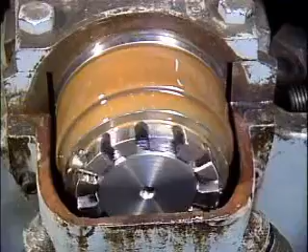A thin film of lubricant is the only thing preventing metal-to-metal contact between the many moving parts in your facility's equipment. If the lubrication fails, expensive machinery can be destroyed in seconds. One of the most widely used types of lubricating devices is a hand-operated grease gun.

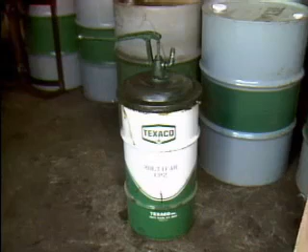Many grease guns can be filled directly from a drum through a fitting. These are called bulk load grease guns because they are filled directly from a bulk supply of grease. Grease is pumped into the gun with a device called a grease gun filler. The filler is often simply a hand pump that is installed on a grease drum.

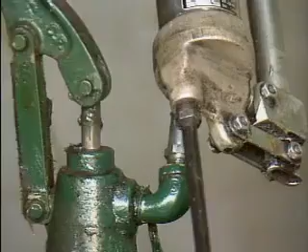The outlet of the hand pump is attached to the fitting on the grease gun and the handle is pumped. When you start to feel resistance to pumping, the gun is full. The cap should always be replaced. Other types of grease guns are filled by replacing cartridges.

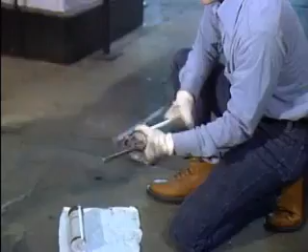The top of the gun is unscrewed, and then on this gun, a plunger at the end is pulled back and used to push the empty cartridge out. The plunger is pulled back and locked in position to make room for the new cartridge.

This new cartridge is opened by removing a plastic bottom cap and a metal pop top. It's placed in the gun barrel bottom first, and the top is screwed back on. To finish up, the plunger is released and shoved all the way in.

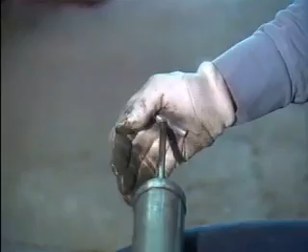Once a gun is filled, it's used to pump grease through a fitting into a machine part. Most of the time, that will be a bearing in a housing. Before lubricating a bearing, it's always a good idea to check it to see if it's running hot. The simplest way to do that is to feel the housing.

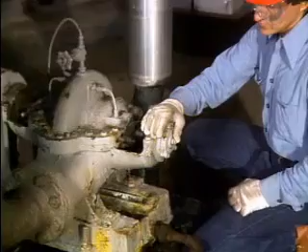You may want to try it with a glove on first. If it doesn't feel hot, you can check it with your bare hand. A hot housing is a sign there's too much friction, possibly because there isn't enough lubricant or the wrong lubricant was used. A hot running bearing should be reported for maintenance.

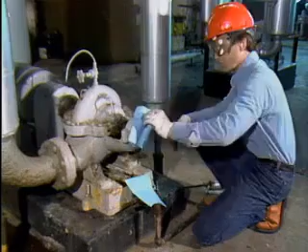Many bearing housings have a drain hole to let old grease out. The plug in the drain hole is unscrewed before new grease is added. It's important to use a clean rag to wipe off the grease fitting so dirt won't be pumped in. The tip of the gun is placed over the fitting and grease is pumped in.

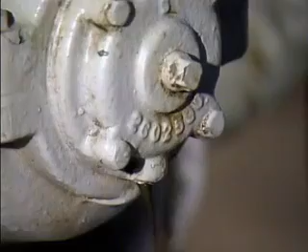On a bearing with a drain plug, the gun should be pumped until the old grease is forced out. In most cases, the new grease will be a slightly different color, so watching for a color change is one way to tell that the old grease has been forced out.

Sometimes, however, the old grease mixes with the new and it's hard to tell them apart. In that case, you may have to estimate when the old grease has been forced out by the amount that's come out. After adding grease, the drain hole is wiped off and the plug screwed back in.

If the bearing isn't turning during greasing, plant procedures may require the machinery to be turned on for a few minutes before putting the plug back in. That distributes the grease in the bearing and forces out any excess.

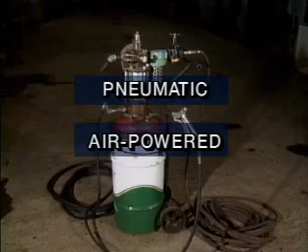Many facilities have pneumatic or air-powered grease guns. This air-powered dispenser consists of a pump that fits on a grease drum. An air hose connected to a source of compressed air supplies air to power the pump. The pump moves grease from the drum through a hose to a grease gun connected to the end of the hose. A trigger on the gun is operated to release grease.

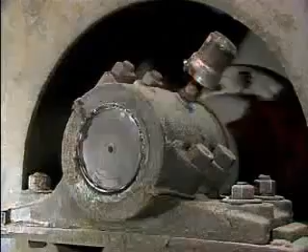Be sure to check your plant procedures when you're greasing a bearing. They may tell you how much grease to apply and whether the equipment needs to be running or not. Some bearings are lubricated automatically. This large sleeve bearing, for example, has no seals.

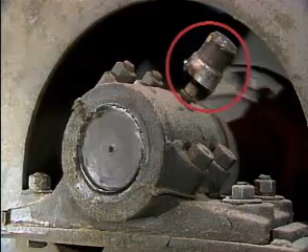Grease oozes out between the bearing and the shaft. On this bearing, the lost grease is replaced from a reservoir or cup. The cup slowly but continually feeds grease to the shaft through a hole in the bearing. A spring-loaded disc forces grease out of the cup and into the bearing.

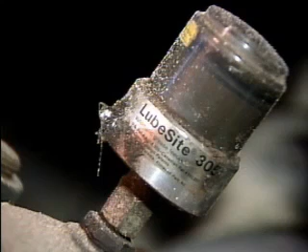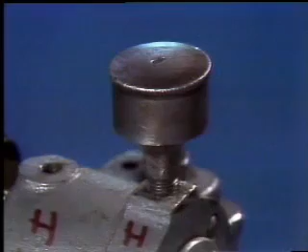Containers such as this one should be checked periodically to make sure they're not running low on grease. If the level in this cup is low, it's refilled using a grease gun. Some grease cups are operated by hand. Grease is forced into a bearing by turning the top of the cup.

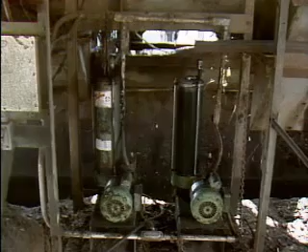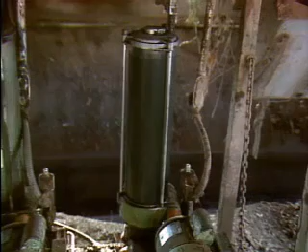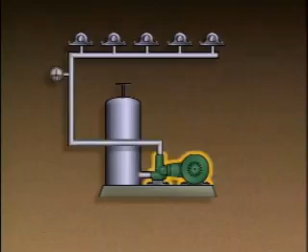This is the cylinder that contains the grease supply. The motor and pump that force grease out to the bearings are at the base of the cylinder. A single line supplies grease to several bearing housings. There are two main things to check on this type of lubricator: lubricant level and lubricant pressure.

On this unit, a level indicator shows how much grease is in the cylinder. A pressure gauge is installed in the grease line. If a blockage stops grease flow, pressure in the line will cause the gauge to read well above normal pressure. If the pump fails or the system runs out of grease, the gauge will read low.

The first step in lubricating a piece of equipment is to obtain the right lubricant. Moving parts can fail just as quickly from the wrong kind of lubricant as they can from a contaminated lubricant or from no lubricant. Once you've determined the right lubricant to use on a particular piece of equipment, you need to get it from storage. So next, we'll look at two ways that oil can be obtained from the containers that it's stored in.

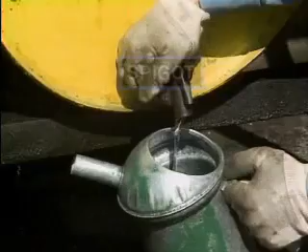Oil used in industry is often stored in large drums. One way to get oil out of these large drums is with a spigot. One type of spigot is opened by pushing down on the handle, which is spring-loaded. The handle closes itself when it's released, although it's a good idea to pull it tight so it won't leak. We've just seen a spring-loaded spigot, but there are other types of spigots commonly used in industry. Some spigots have a valve that is turned to dispense oil.

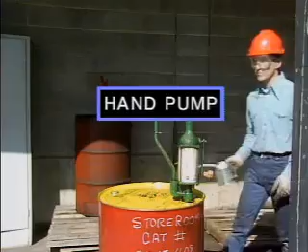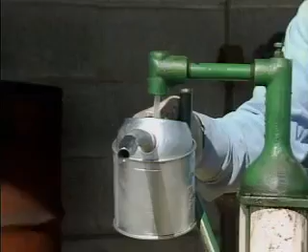Oil can also be drawn out through the top of a large drum with a hand pump. This hand pump has a drip collector that's pulled aside. The oil can is held under the spout. On this model, the handle is first turned one way to prime the pump, then turned back to pump oil into the can. When the can is pulled away, this drip collector automatically swings into position under the spout.

We've seen how to select the right lubricant for the job. We've also seen a couple of ways to dispense oil from large drums. In this part, we'll discuss some oil lubricating devices. We'll look at a drip feed oiler, some oil baths, and a ring oiler. Let's start with the drip feed oiler.

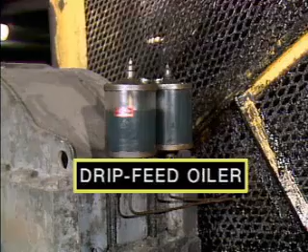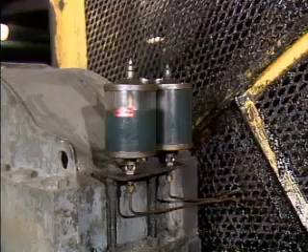A drip feed oiler is an automatic lubricating device used in industry for many different applications. In this example, drip feed oilers are being used to lubricate a chain drive. There are two oilers, one for each side of the chain. Glass reservoirs hold the oil supplies. As this illustration shows, oil drips from each reservoir into pipes hanging over the chain.

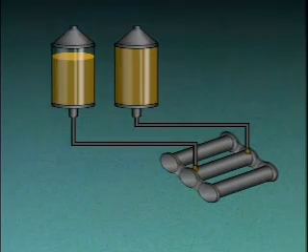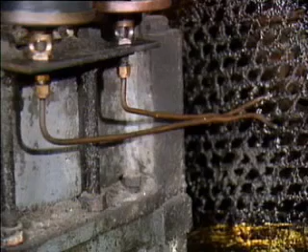A sight glass at the bottom of each reservoir can be checked to see if oil is dripping through at the correct rate. Most facilities have guidelines that specify what the correct drip rate should be. On this oiler, the drip rate is adjusted by turning a knob at the top of the reservoir. A lever above the knob is used to shut the oil flow off entirely. That's usually done when the device being lubricated is shut down.

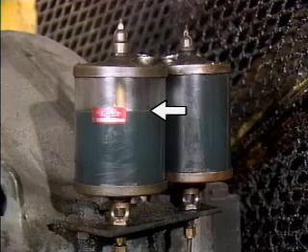The oil level can be checked by looking through the glass reservoir. If it's low, the reservoir should be refilled. Oil is added through a small opening at the top. The lid should be clean so that no dirt falls in when it's opened.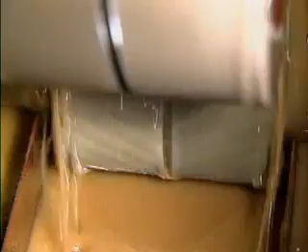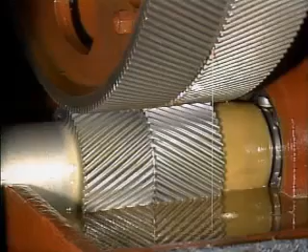Another method of lubrication, the oil bath, allows components to be partially immersed in a supply of oil. Oil baths provide oil for lubrication and also for cooling. In this example, a gear sits in a supply of oil. As the gear turns, its teeth pick up oil and carry it with them. The oil is transferred to other gears as they mesh with the one in the oil bath. Oil baths are also good for lubricating rolling element bearings. The balls or rollers pass through the supply of oil and carry the oil with them as they rotate.

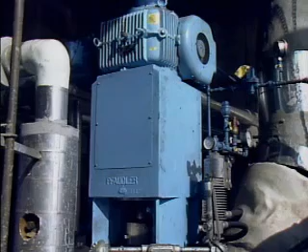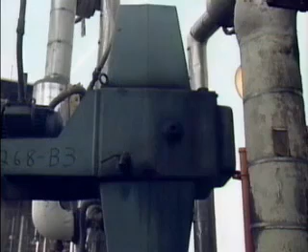There's an easy way to check the oil level in many bearing housings and gear casings. This sight glass indicates the level of oil in a casing containing gears driven by an electric motor. The oil level in oil baths is usually different depending on whether the equipment is running or not. So when checking oil levels in your facility, be sure you know whether it should be checked with the equipment on or with it off. The level in some oil reservoirs can't be checked when the equipment is running. That's because the oil is churned around so much that it's impossible to determine an accurate reading.

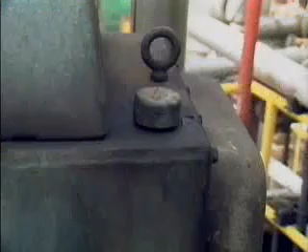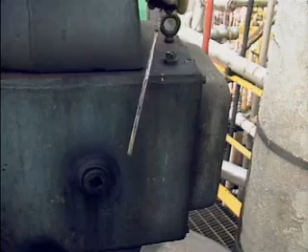In this large gearbox, for example, the oil level is checked with a dipstick. With the unit off, the dipstick is wiped off. Then it's pushed all the way back down into the oil and pulled out again. The level is above the low mark, so it's in the acceptable range. If it were at or below the low mark, more oil should be added.

When checking the oil level in any reservoir, it's also a good idea to check the oil's condition. If the oil has turned dark or feels gritty, it may be contaminated by dirt or products of oxidation. If water has contaminated the oil, it can acquire a milky appearance. It may be necessary to identify the source of the contamination before replacing the oil.

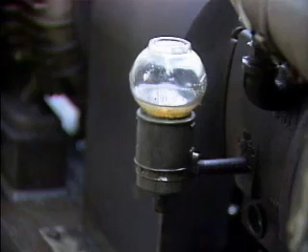The oil baths we've seen so far all use a gear casing or bearing housing as a reservoir for oil. But there are other types of oil baths that have reservoirs outside the housing. This one, for example, has a glass reservoir that automatically releases more oil into the bearing housing when it's needed. The open end of the reservoir sits in a cup, which is connected to the bearing housing by a pipe.

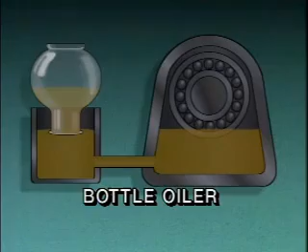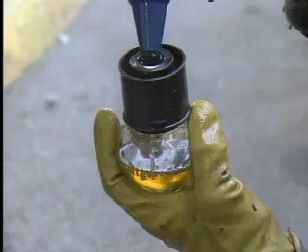The bottle reservoir should be nearly full. This one needs refilling. To fill a bottle oiler, turn it upside down and pour in new oil until it's full. Then put it back in the cup. The main thing to check a bottle oiler for is a faster than normal drop in oil level. If that happens, there may be a leak somewhere that should be fixed as soon as possible.

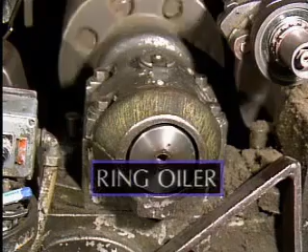Oil baths work well with gears and ball or roller bearings. Now let's look at sleeve bearings. Most sleeve bearings need a way to get oil in between the journal and the bearing. One way of delivering oil to a horizontal sleeve bearing is with a ring oiler. From the top, the oil ring is just visible under the oil filler cap. It's a bronze ring that rides on the journal.

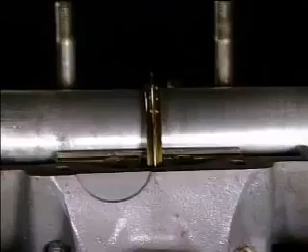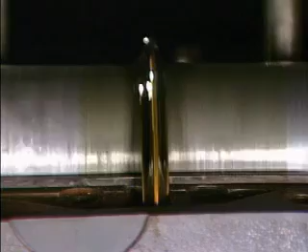On this partially disassembled ring-oiled bearing, you can see how the oil ring fits in a gap in the sleeve bearing. The ring is large enough to hang down into a reservoir of oil in the bearing housing. As the journal rotates, the ring turns with it. The rotating ring brings oil up to the top of the journal from the reservoir in the bottom of the housing. There's an inspection opening at the top of the housing.

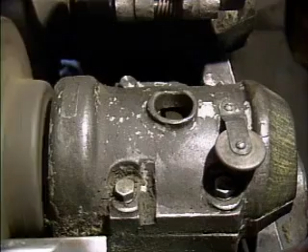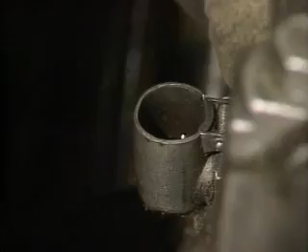The opening is used to observe the movement of the ring. The ring should turn smoothly. If it isn't turning at all, the bearing won't be lubricated. The opening is also used for adding oil to the reservoir. The oil level is checked through a flip cup on the side. The oil level in this unit should be halfway up the cup.

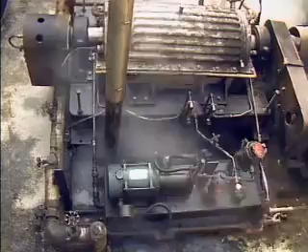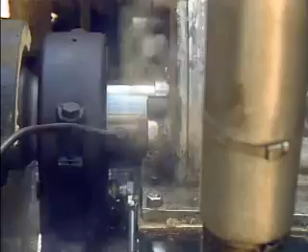In some lubrication applications, gravity or the rotation of equipment can't supply enough oil. In these cases, a circulating oil system driven by a pump is used. This piece of equipment contains a heavy shaft that spins at very high speed. Each end of the spinning shaft is supported by a roller bearing in a housing. Each bearing is lubricated by a system that circulates oil through it. Let's look at a simplified illustration of this system to see how it works.

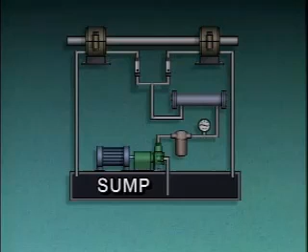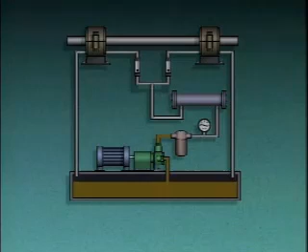Here is the shaft, and here are the bearings. The pump for this circulating oil system sits on a tank called a sump. The sump holds the oil supply. An electric motor drives the pump. The pump draws oil out of the sump and sends it to a filter. The filter removes dirt and metal particles worn from the bearings. A gauge indicates the pressure of the oil.

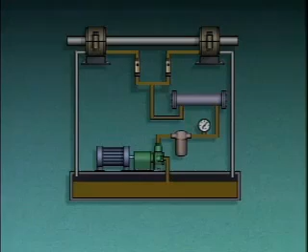The oil then passes through a cooler. From the cooler, the oil flows to a T, where the flow splits to go to each of the bearings. A flow indicator in each line shows the flow rate to the bearings. Oil enters the bearing housings, lubricating the bearings. The return lines carry the oil back to the sump.

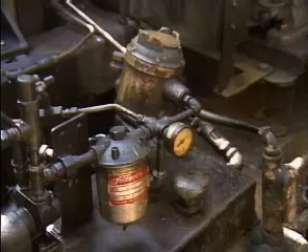Your duties on a system such as this will probably include checking oil pressure, flow rate, and oil level. In this system, oil level is checked with a dipstick located under the sump's filler cap. You should also check for leaks in oil lines and bearing seals.

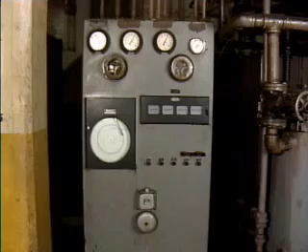For large systems, you may have a panel with gauges that indicate oil pressure and temperature. There may also be alarms that indicate system malfunctions and low oil levels.

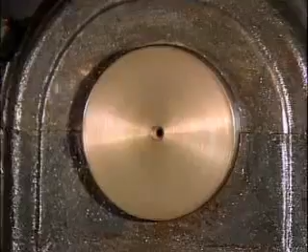Most bearings are enclosed in housings. In addition to supporting and protecting the bearing, the housing also serves as a reservoir to hold the supply of oil or grease that lubricates the bearing. With most bearings, the opening where the shaft leaves the housing is sealed to keep lubricant from escaping and contaminants from getting in. Probably the simplest type of seal is a contact seal.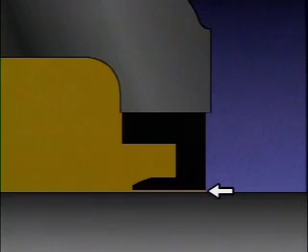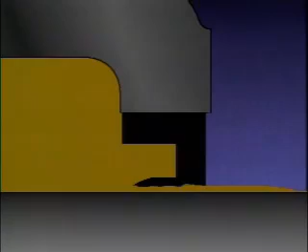A seal in good condition will allow only a very small amount of lubricant to seep between the lip and the shaft. The lubricant reduces friction between the seal and the shaft. The lip on a contact seal will eventually wear down, however, allowing lubricant to leak out at an unacceptable rate. For this reason, checking lubricant seals may be an important part of your duties. Any seal allowing a noticeable amount of lubricant to escape should be reported.

Contact seals used with grease can be damaged by over-lubrication. Excess grease will be forced out under the lip. This can deform the seal and allow even more grease to leak out. If too much grease leaks out, the bearing could fail. So lubricate bearings with contact seals carefully according to your plant procedures.

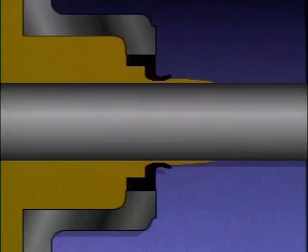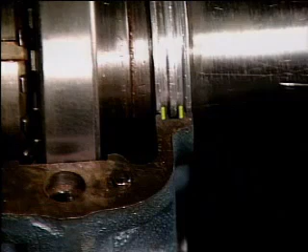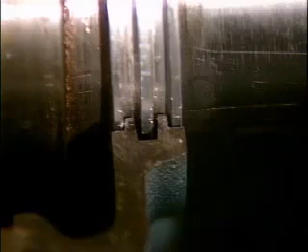Another type of seal is a labyrinth seal. A labyrinth seal consists of two sets of interlocking metal ridges. In this particular design, one set of ridges is attached or built in to the bearing housing. The other set is part of a ring that fits tightly on the shaft. As this illustration shows, the narrow gap between the ridges is like a maze or a labyrinth. That's why this type of seal is called a labyrinth seal. Both the twisting path created by the ridges and the small clearance between the ridges restrict flow.

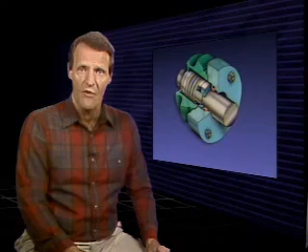While both labyrinth seals and contact seals are used to help restrict the flow of lubricants, they can't be relied upon for all fluids and in situations where it's necessary to virtually eliminate fluid flow. For example, when hazardous fluid is contained in a housing, even a small amount of leakage would be undesirable. To minimize fluid leaks in these situations, another type of seal called a mechanical seal is often used. This illustration shows a cutaway of a mechanical seal.

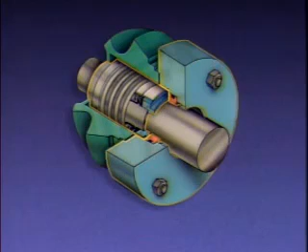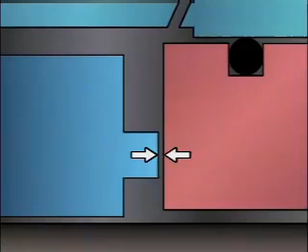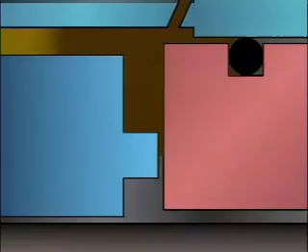To prevent the seal rings from being damaged, some type of lubricant must be supplied to them. In some applications, the process liquid is used as the lubricant. In other applications, an external liquid may be used to lubricate the seal rings. The external liquid is sometimes referred to as a seal flush. Here is a line that supplies external fluid to a mechanical seal.

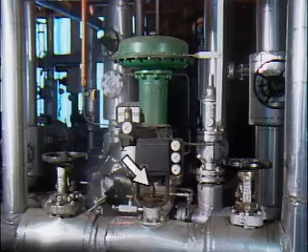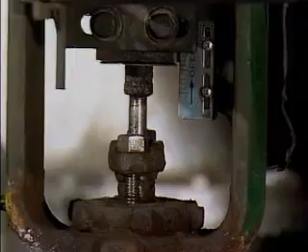To keep process fluid from leaking out along valve stems, the stems of many valves are sealed with packing. Valve packing is frequently a rope-like material soaked with a lubricant such as oil, grease, or powdered graphite. The lubricant reduces friction between the packing and the valve stem. The packing fits snugly around the valve stem. The motion of the valve stem can gradually wipe away some of the lubricant where the stem contacts the packing. If that happens, the valve may start to stick.

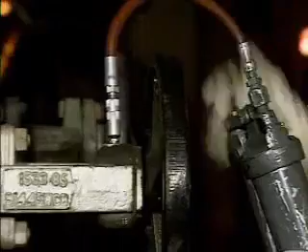To keep that from happening, this valve has a fitting that allows grease to be pumped between the packing and the valve stem. After wiping the fitting to prevent contamination, the worker uses a grease gun to apply grease. Your facility procedures may specify how much and what kind of grease to apply. After the grease gun is removed, excess grease is wiped off the fitting. This prevents dirt and other contaminants from sticking in the grease and collecting around the fitting.

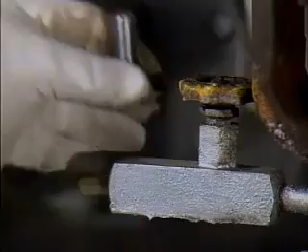Another method for applying grease to the valve stem is with a lubricator. To apply the grease, the bolt on this lubricator is screwed in until the grease in the lubricator is pushing against the valve stem. In this topic, we discussed how seals restrict leakage and how valve packing can be lubricated. Take some time now to try a couple of practice questions.